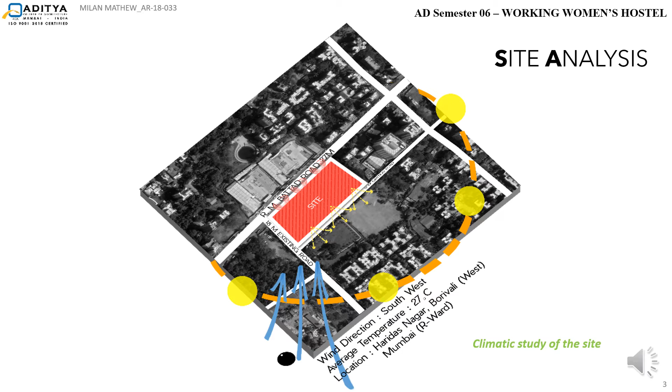This was majorly to understand how well the site is connected within various amenities in the square kilometer, how well it's connected from the railway station to the site, and how the station and site are connected to the metro station on the link road.

Talking about the analysis, over the 1 square kilometer, a large amount of green spaces have been indicated on the resident areas. Even so, in the whole 1 square kilometer, major buildings observed are residential and commercial, and institutional buildings are very few and scattered.

Case study: Rwanda Women's Opportunity Center is one of the case studies done with respect to spaces for women. The concept and ideology was to develop the form and make the structure self-sufficient. The center is an excellent example of how spaces under one umbrella can be inclusive and welcoming to all kinds of women.

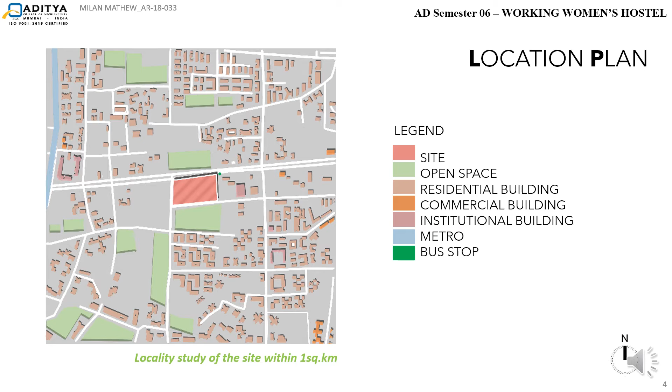The basic takeaway I got from this case study was how to make a structure self-sufficient, how to make it more self-absorbent, or how to make it more independent in every aspect of the design.

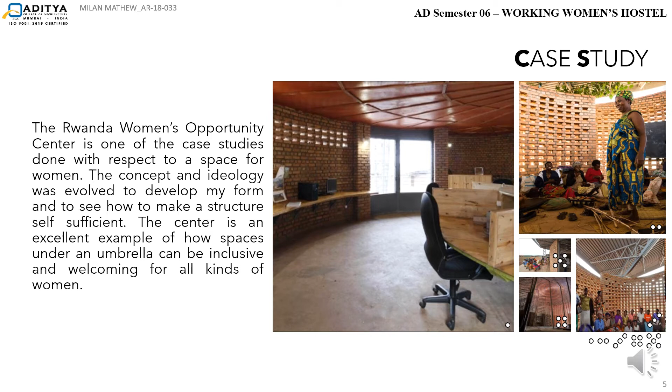In the concept, the main purpose of this modular arrangement is that public activity should not just be contained within the structure, but should also spill over into the green spaces and open spaces adjacent to it, not just along the horizontal but also vertically.

In the second diagram, the red block signifies the semi-private activities, and the blue signifies the private activities, which coincide in the same module, differentiated by an increase in height and spatial landscape. The gray shaded area near the staircase signifies the perforated wall, mainly for ventilation, which acts as a lung in a singular module, making the single module self-sufficient in various aspects.

The sectional schematic section is to understand how the screen walls and the perforated brick walls have been provided, and how the landscape at various levels acts as the lungs of the whole structure.

These are the initial sketches and conceptual models of the design.

Site plan. The main entry to the site has been provided from the R.M. Battad, the 27-meter R.M. Battad road, and a service entry has been indicated from the back road, the 18-meter road, observed on the southern side.

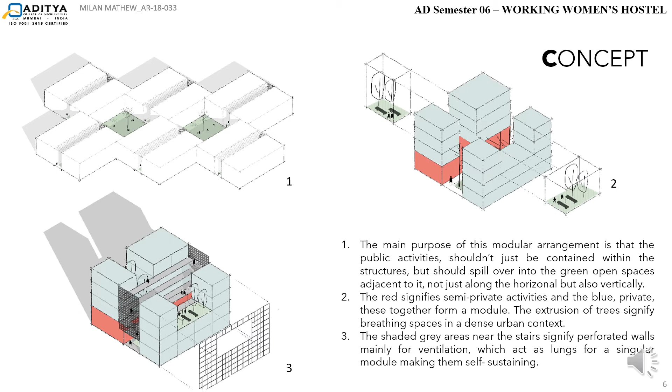The main motive, for the majority of the rooms to be provided on the southwest direction, was to keep it cross ventilated, and for the view. The basement plan.

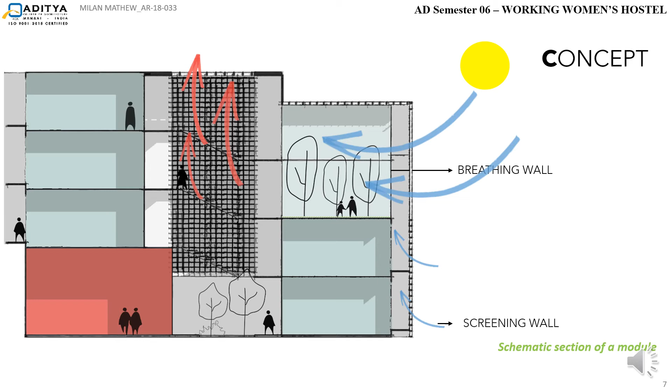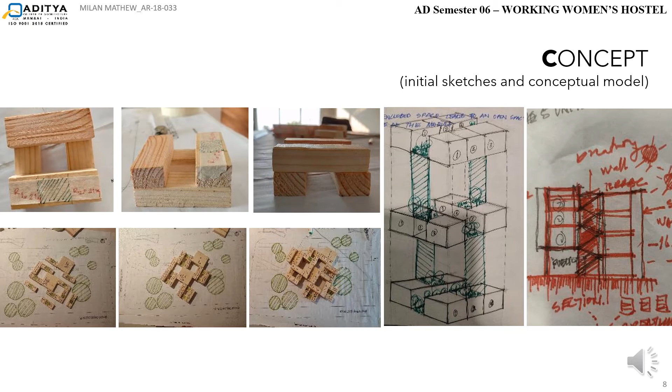This is the ground floor plan. The plinth is at 0.45 meters, and at every courtyard, or at every interval between the various modules, there's landscape. Hence, this talks about the semi-private activities spilling over onto these areas.

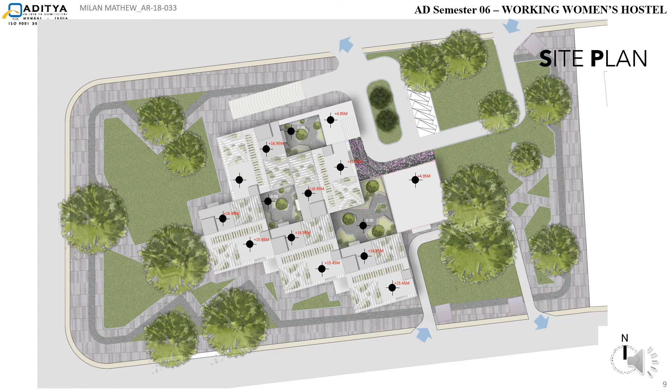This is the floor plan at 3.95 meters. This is the floor plan at 6.45 meters. This is the floor plan at 9.75 meters.

The floor plan at 9.45, 12.45, and 15.45 meters. This is the floor plan at 13.95 meters and 10.5 meters. This is the terrace floor plan.

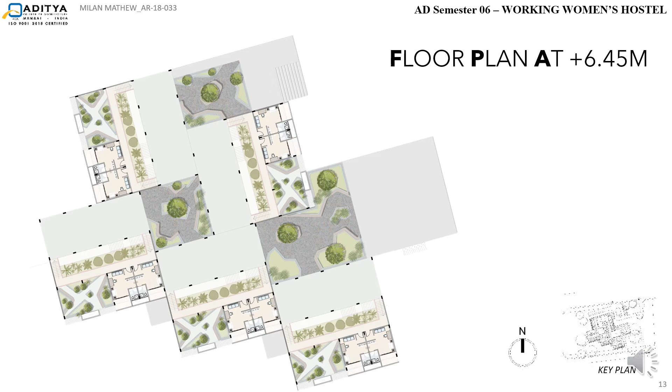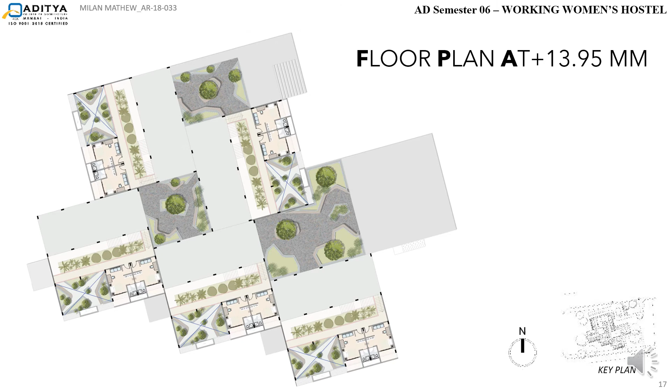This is a single occupant room. These are double occupant rooms. This is the room for the disabled. This is the guest and the warden room. For the guest and warden room, I have used the same layout.

This is the gym. This is the common room.